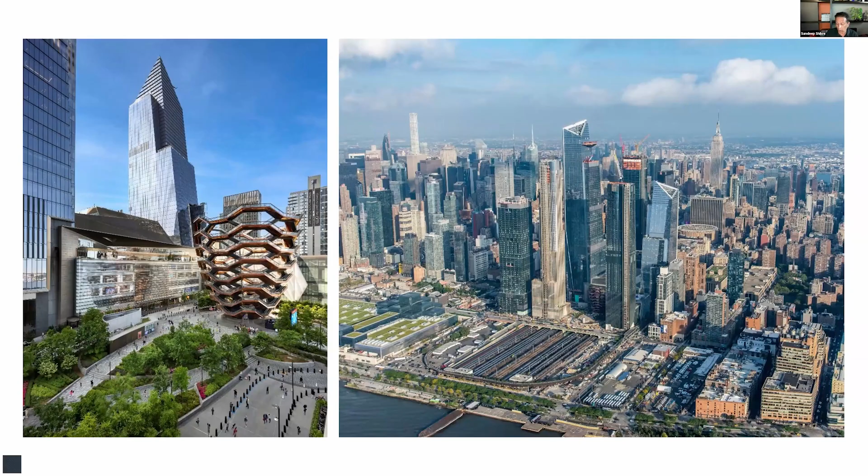Now we are moving from the monocentric city to the polycentric city. The monocentric city had a town center with everything moving around it, and the suburbs coming up for residential development.

In today's situation, polycentric cities are more required, where people want everything within 1 kilometer from their house, be it their school, healthcare facility, recreational facility, office space, entertainment, and so on. So there's less pressure on commuting through vehicles, and less fuel emission. It's more sustainable, and it's working perfectly fine in all parts of the globe.

That naturally further pushes our boundaries to go more taller. So the thought here is a tower, that is density, togetherness, that is reliability. How do we make a nice confluence between both of these thoughts? I'm going to share a couple of our case studies. This is one of our projects which we are doing right in the heart of the city of Mumbai.

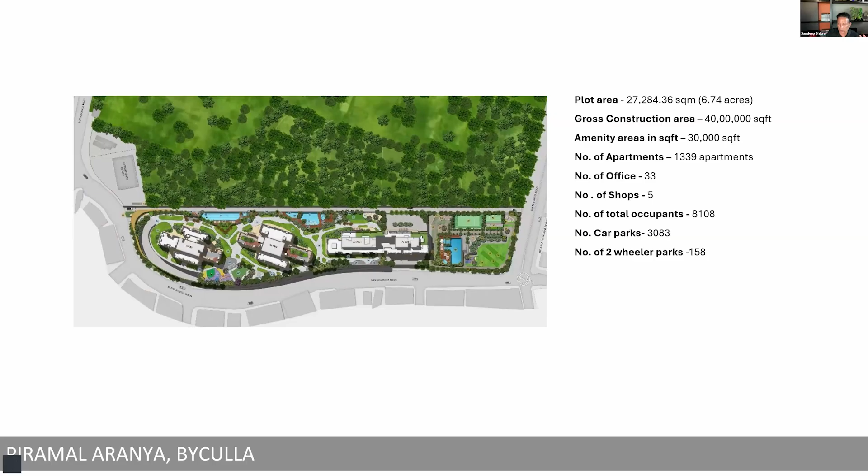Every horizontal space that we could get in this master plan is being utilized to provide green spaces. There's vertical vegetation, vegetation coming up on the podiums, vegetation coming up into people's houses, in the balconies, verandas, and also on the rooftop. That's the context you can see with the high density, high rise community living.

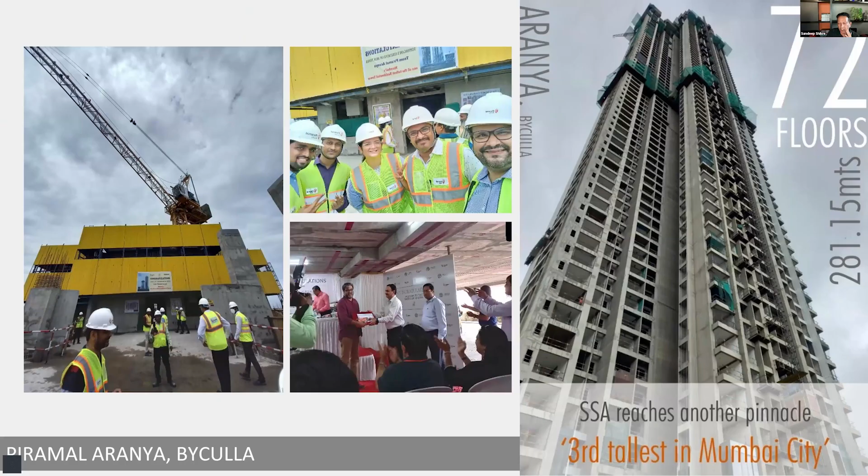This is currently the third tallest building in Mumbai and in India, but it's the tallest building in India where occupied building is concerned. That's the snapshot of the building when it was nearest completion. It has a very simple envelope where again the thought is to get a lot of daylight, openable windows where you can have natural ventilation, enjoy the weather, and we could almost continue that particular forest filtering into the master plan, whereby the podium also has lots of trees.

Overall, we planted more than 1,500 trees on the podium and on the ground. There are several recreational facilities, which again give an opportunity for all age groups in the family, right from toddlers to teenagers to mid-agers, parents and grandparents. A lot of community

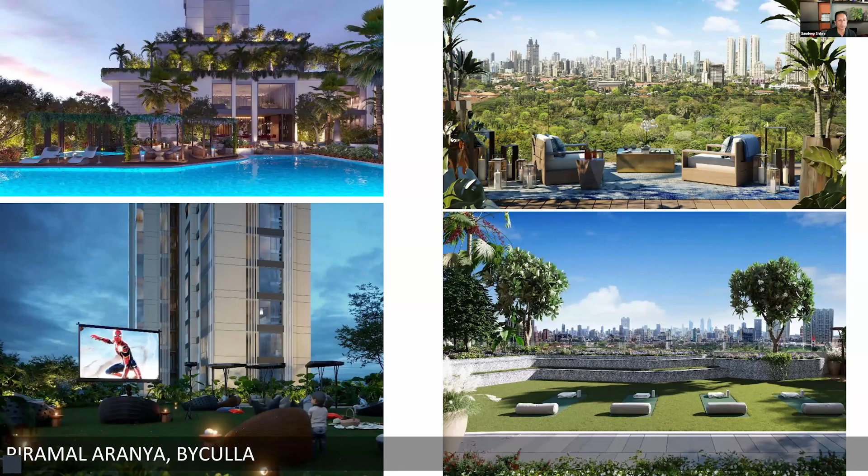conglomeration spaces where people can come together. Practically everything that you need for a livelihood is available in the compound. That includes your health, your fitness, your hospitality requirements, your requirement for relaxation, meditation, and also there's a convenience shop. So people would hardly go out of the campus only for the purpose of going to work. The rest of all the things are available within the compound.

That's also a concept where you can have a very compact development, and there's less pressure on people for commuting with vehicles. The rooftop is also a great opportunity because Mumbai has great weather and there's a beautiful stunning view all around. So these particular premises are complete.

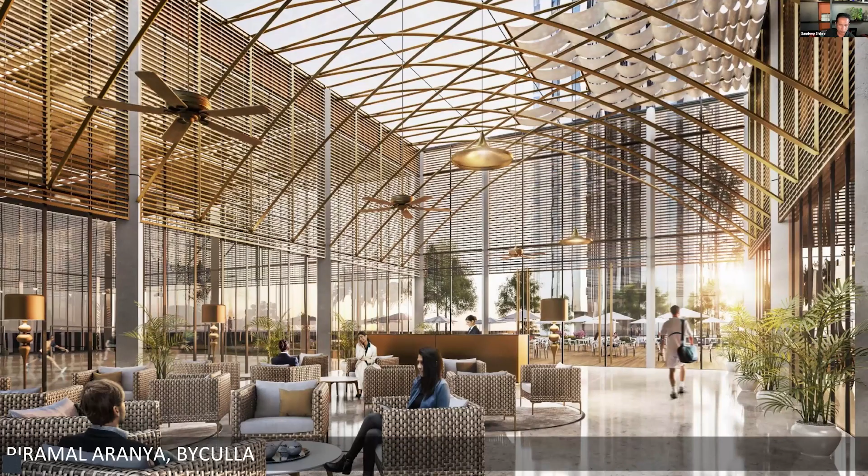There are almost 1,400 families living there, and they have several indoor-outdoor facilities, which maintain that community living spirit amongst all of them. So it's a vertical city, which is a need of the hour. We've tried to accommodate that by providing a very compact development.

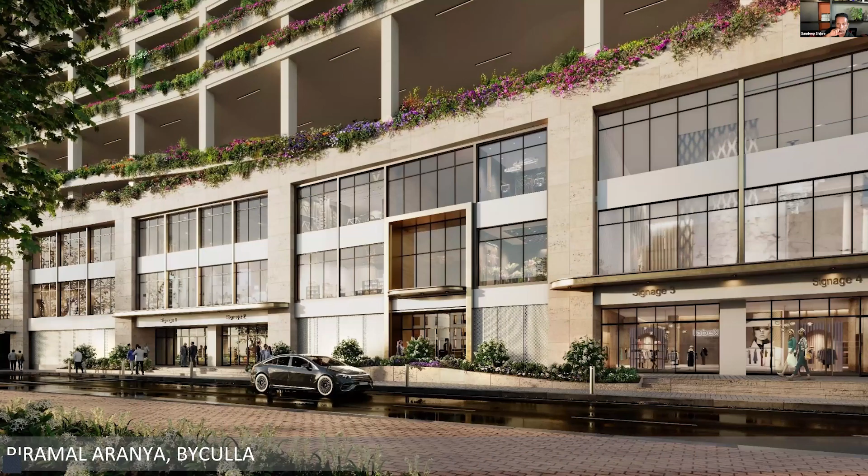This is a convenient shopping area, what is normally required for the residential communities within the compound. And of course, it has a nice biophilic design whereby the envelope embraces the nature around you. So you have a beautiful sky view, you have nice daylight filtering into every square foot of the apartment. That's a rooftop where people can go at a height of almost 281 meters and enjoy the city view. At the same time, a lot of social gatherings and festivals can be held over there.

I move on to my second case study. This is a mixed use project, a little different. This is coming up into a place in a city where there was no commercial space, and this is a new thing that is evolving. There is no particular central business district anymore. People are having all kinds of opportunities to have a mixed use development. This is the tallest mixed use building in the country.

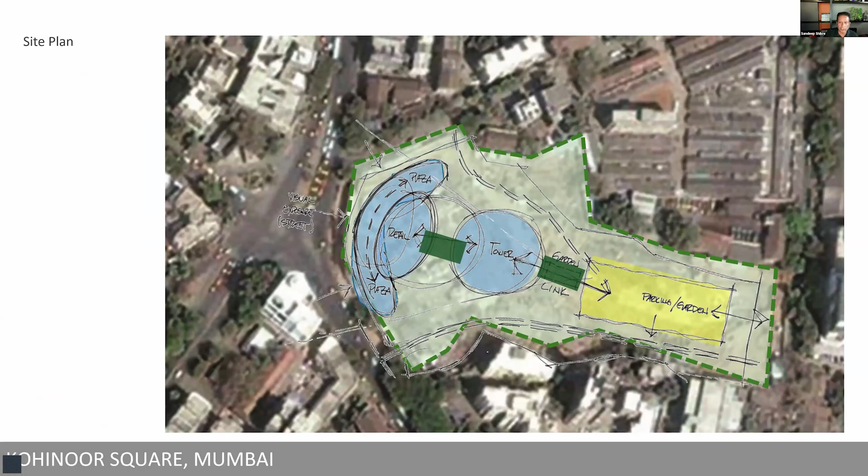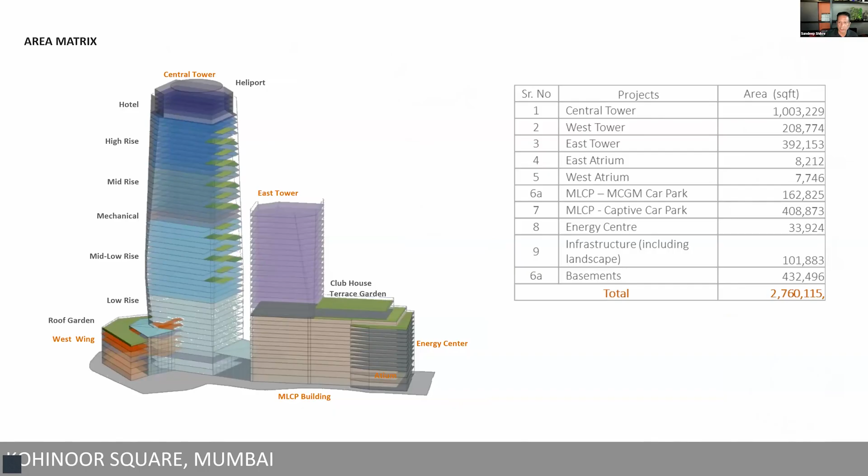Again, a very strategically located plot where we could have a master plan, with retail at the ground, restaurants and hospitality at the lower level, and a tower springing up with a helipad on top. It's totally a 3 million square foot development with retail, office, hospitality, and residential. The numbers are overwhelming: almost 2,200 car parking spaces, 132 families, 9,000 employees.

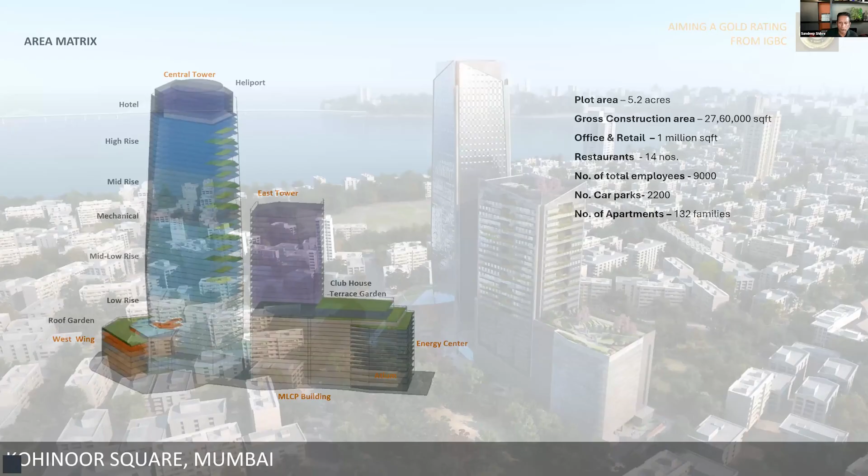That's an aerial shot. It has multiple drop-offs like you have at an airport, because every day 10,000 people would come and go. It's got a beautiful glass facade which allows daylight to filter into every square foot of the building. There are lobbies where a large number of people coming in and going out are accommodated.

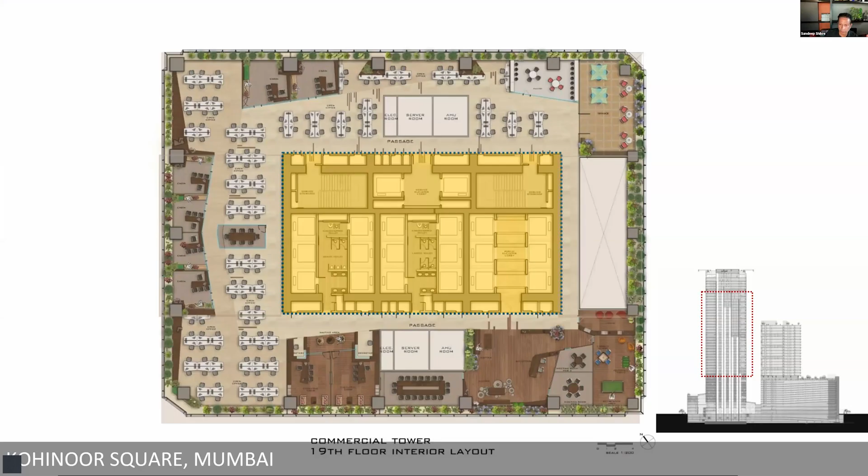The footprint is very thoughtful, with a central core and almost 14,000 square feet of office space which has no column or beam or any structural interventions. Almost all the daylight comes inside the office space. Every work session can have a sky view, which is very important.

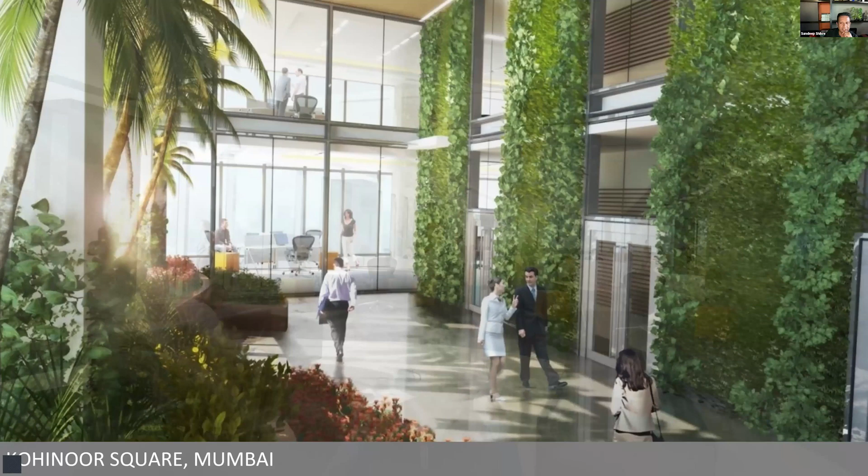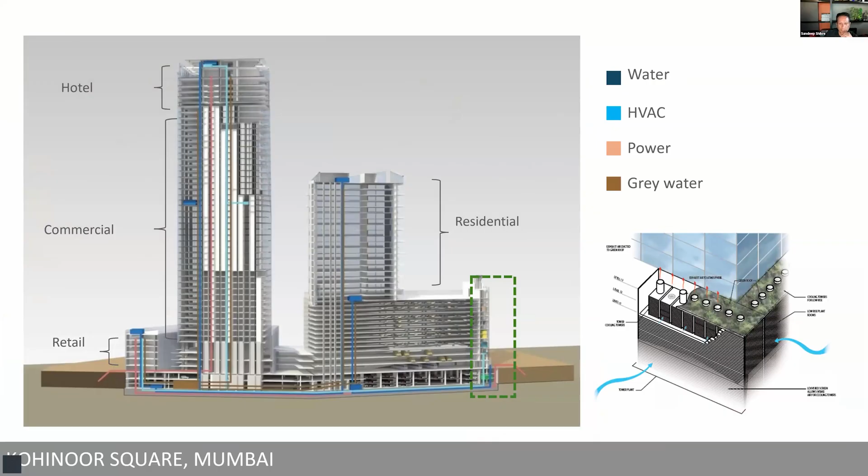Every floor has a sky garden with oxygenated plants, which biofilters the air and purifies it. A lot of engineering thought went into vertical stacking. There's an energy center in one corner that houses the DG set, transformers, cooling towers, and there are tunnels which take all the services on top.

Vertical transportation is one of the very important aspects, because that's a lifeline for the tall building. This is an Indian Green Building Council Gold rated project. Here are some snapshots of the offices.

There's a signature hospitality space on the rooftop, which also becomes a nice gathering space. It's got a stunning view on all four sides.

There is a residential building sitting on top of the parking garage, which has around 132 families. Every apartment has deep balconies and terraces, so there's also a good indoor and outdoor connection.

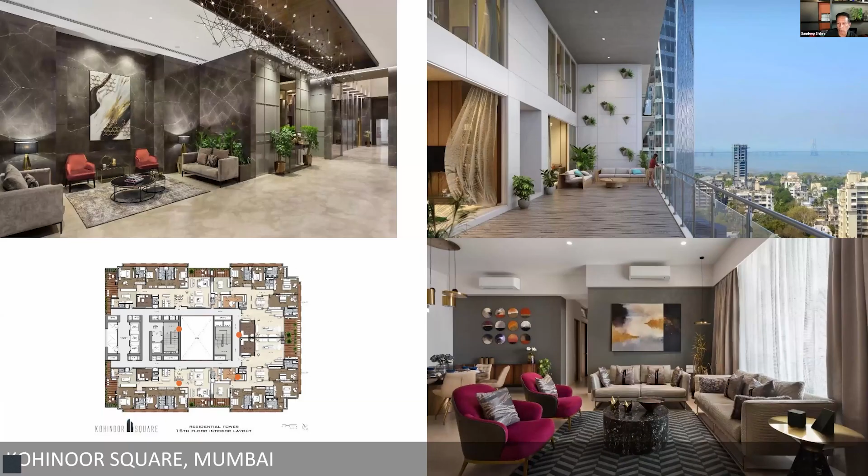As we don't have space on the ground, the podium tops and terrace tops have been utilized for recreational spaces. As I mentioned, every square foot which is horizontal is green. We have a clubhouse on the 14th level with an infinity pool and all kinds of facilities.

There's a small film that explains the project.

Before concluding, I would say that the future is just like James Cameron's sci-fi movie Avatar, which depicts the self-sustainable super tall home tree. This would probably be the next step after zero energy and positive energy structures, where skyscrapers will sustain the neighboring communities by reducing the eco footprint, reducing energy consumption, reducing travel impact, reducing land use, increasing vertical density, and also maintaining farm and forest land. So there's no doubt that tall buildings and high density structures are the need of the future.

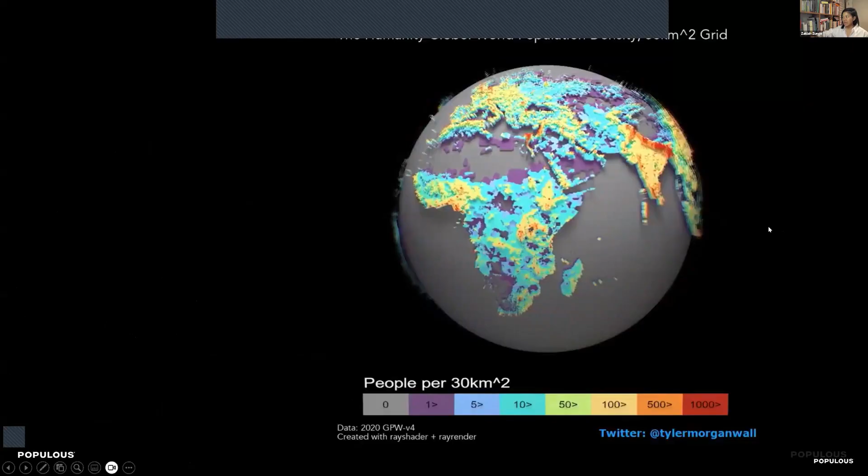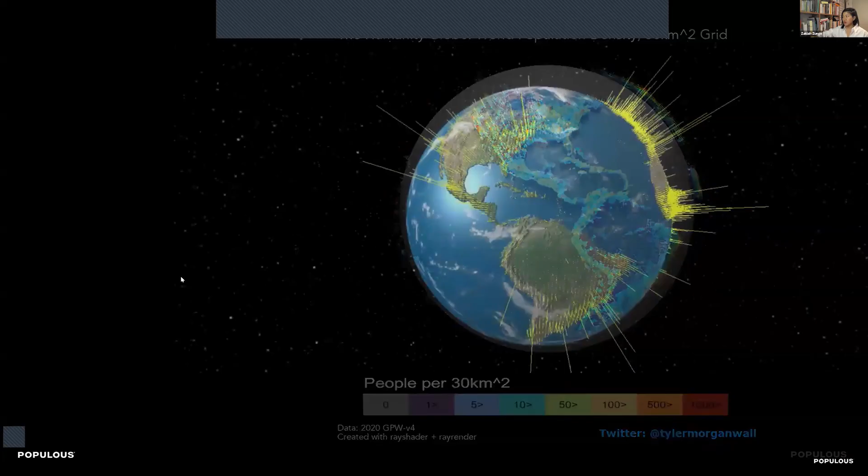This is a color coding of the number of people that we have in terms of spaces. You can see in Asia, they are more red, and at the coastal areas it's a lot higher. Java is also really red. If we were to turn this into an even more visual graphic where the high points show the higher density areas, we have to have some kind of a long-term solution, right?

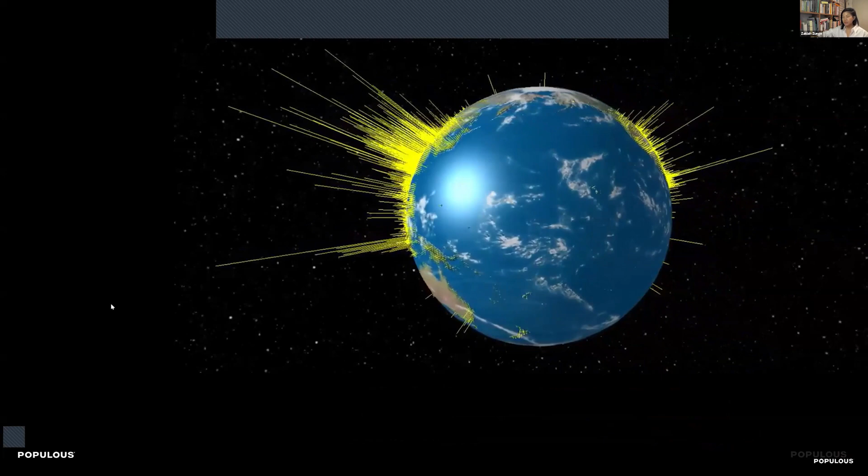And we already see this long-term solution happening in a few countries, including where I live right now, which is Singapore. And my first takeaway of it is: planning is everything. All of us are architects and we love to see our creations come to life.

We love to shape and sculpt and meld art and space together. But it goes beyond that. You build one, you build two, great. But then you realize that you're living on an island full of these cities.

And again, Hong Kong is an island, the Hong Kong island itself, very similar to Singapore. And a lot of its spaces are actually not very buildable because it has mountains and hills, really steep slopes that are pretty dangerous for construction.

So what are we doing to kind of resolve this? Are we going to keep building higher? In Singapore, we almost just erase older buildings and then build even taller ones that are more efficient. And it seems like for now, it becomes a viable solution for long-term high population areas.

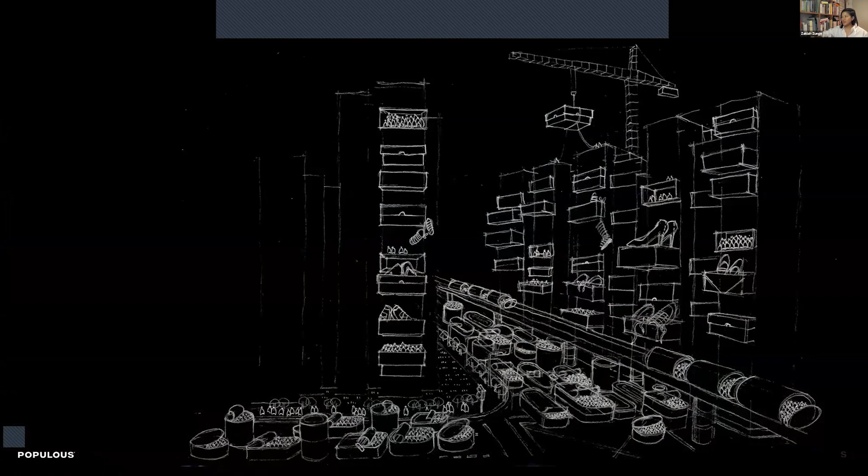This is a funny sketch I did when I was a student. You gotta go to school or work, and you come from a shoebox apartment, you go down to the tin can, and you get packed in a bus full in a traffic jam. It doesn't end, right? Even if you take the train, it's packed.

What becomes the end of this? Because Singapore, I feel, and Hong Kong, has maximized a lot of our towers. We have been pushing and pushing to make everything very efficient, very multi-use. Even our sports halls are all stacked on top of each other.

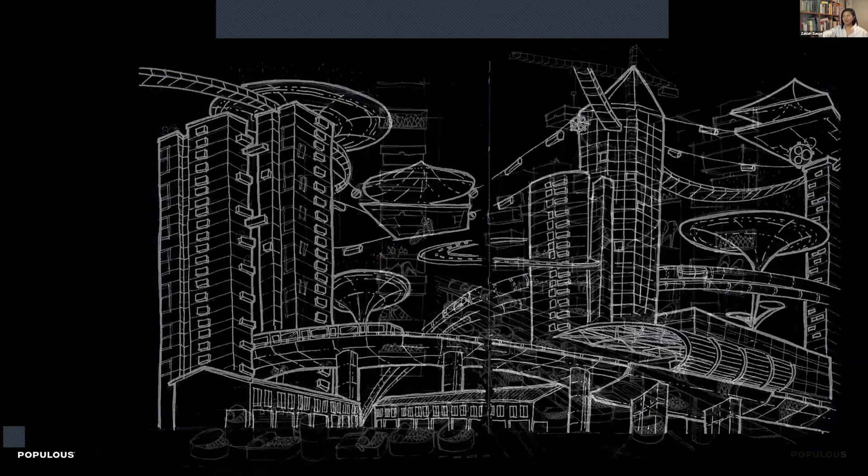And somehow as kids, we are kind of alluded to this cyberpunk, Blade Runner, flying taxi image of the future. Does the future need to look like this? I'm not sure. Are our buildings ready to take on the cable tension forces of these floating bridges? It's something for us to think about, right? Clients never asked us to do that—we're not doing that yet.

What we can do for now, though, going into the future, is to embrace the negative spaces. What I mean is when we have a high-rise, high-density city, like what you see here, and you have the opportunity to actually have some breathing space—all I'm saying is take a pause, allow for that to happen, allow for that to sit in.

Because that very space is where you allow people to come in. That's your civic community space. That's where you can build your stadiums, your co-work centers. Airports are definitely very far out from the city because you have airplanes flying in. But also, when you want to create a draw, you need to have that gap.

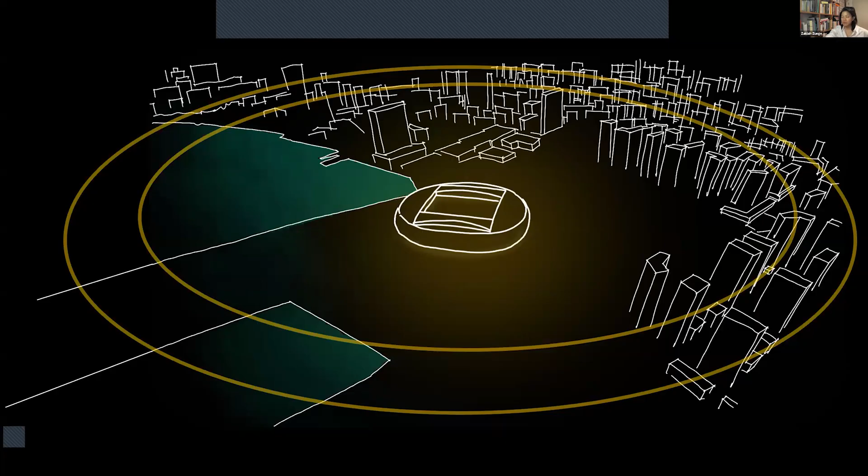And when it was reclaimed, it was used for Kai Tak Airport up till about the 1980s, 1990s. And if you look at the old Kung Fu movies, if you landed at Kai Tak Airport, they were ironing from the window. At some point, the planes got larger and bigger and heavier, and it couldn't support them anymore. We actually had to tell the client, you know what?

Don't build anything. Don't build another 50 towers and take a risk. Let it sit. Let it become a sports park. And becoming a sports park was the best decision. I mean, look at this, right? It takes a lot of bravery from the client to say, hang on, I'm not going to build another one of these towers because they're all competing. But a sports park is to serve everyone.

What it does also at night, it offers some kind of visual respite. It says messages like 'Good morning,' Coldplay is coming, and this is very much similar to, if I were to put it on steroids, the MSG Sphere in Vegas. This is the largest almost spherical structure in the world. It's much wider than it is tall, with 1.2 million LED pucks. And with the MSG Sphere, you literally have to punctuate the negative spaces with the nodal point.

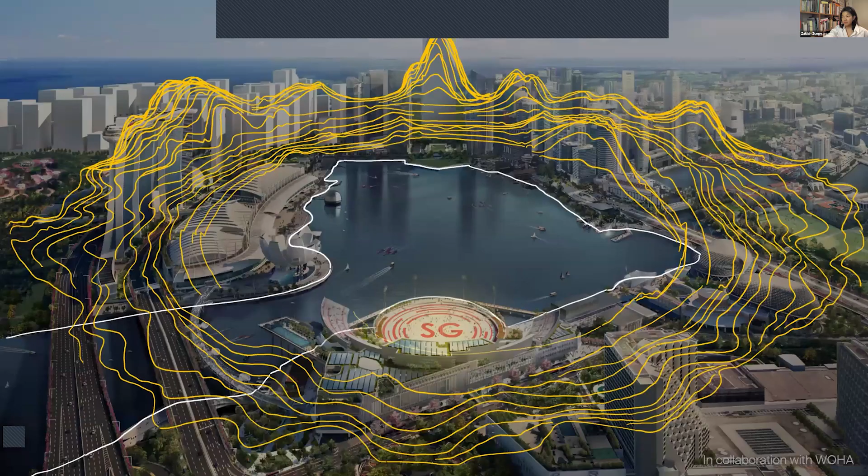So if you're wondering what this funny shape on the screen is, this is actually Marina Bay. It looks a little unrecognizable because there are no buildings on it. But what I want to show is with everything that's built there, you might recognize it a bit more. In this image, if I start from the left side, you have Marina Bay Sands, and then you've got the banks and all these towers.

And as you go towards the right, you've got the older Parliament, followed by the cultural centers, and then we have NS Square right in the middle. While Singapore prides itself on all these super efficient, economically viable banking towers, every nodal point, every negative space has its own individual identity, and they're very distinct from each other.

If I were to start from the left, we have Gardens by the Bay. We reclaimed it, let it sit for 10, 15 years where nothing happened, and then we just built a park. What kind of statement is that, right? Of course, next to it there's a casino. Yes, it more than compensated all that money.

And then you go towards the right, you have the Padang, which was a political space to voice maybe unhappiness or what have you. Then towards the bottom, there's the Esplanade, which was Singapore's icon of the 2000s, late 1990s. And right in the middle and bottom of this is NS Square, which is the space we're going to celebrate Singapore's birthday, and F1 is going to go through there.

And just to curate this takes a lot of effort from everyone. To hold back and not build more is a restraint that we all need to practice to make sure that our cities still remain livable.

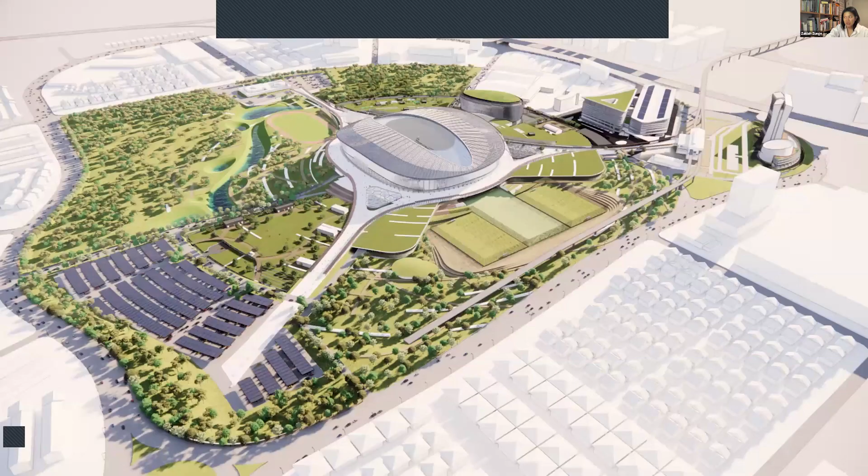This is what we're going to do to make sure that our cities keep on living again. And with that, I'll just end with an image of a master plan. You can see over here, we have like a mix of maybe mid-rises. We've got a bus terminal, we've got a hotel, and kind of alluding towards the middle is actually the stadium, which is Shah Alam. It's a 45,000 seat stadium.

And that gap allows it to take shape, to manifest the concept of connecting the LRT station, which is transport, to the mosque in the north, top of the page, to the night markets that you have at the bottom left of the page. So with that, I'll just end my presentation here. Thank you for your time.

Thank you so much for the presentation. I'm sure all our audience members were quite excited and looking forward for the presentation, and now they are extremely happy to actually see the kind of works that you're doing. So thank you very much for that.

So both your presentations highlight the power of architecture that connects people, shapes communities, and inspires engagement. Let's explore a few deeper threads in conversation before we move on to the audience questions. One question I want to ask, either of you can answer, is how do you ensure that your projects, even at large scale, remain human focused and welcoming? Because when there are large scale projects, it becomes quite difficult sometimes to match the human touch, the human focus. So how do you deal with that? Either of you can answer. Both of you, actually.

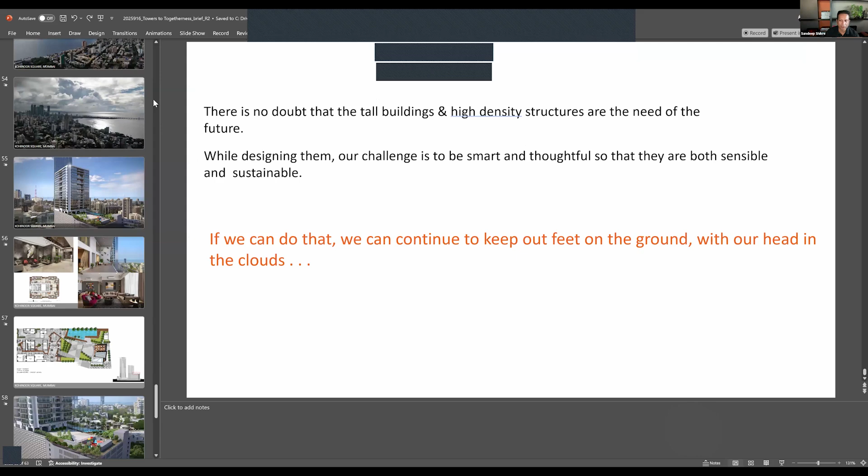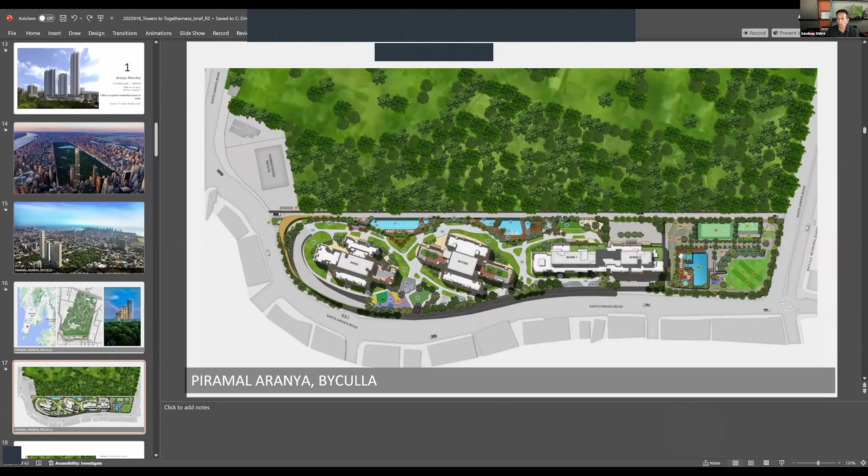Which again focuses on the surrounding, where we could focus on the biophilic characteristics which is around the site. And that's so important to capture, and make sure that people, while they are into a highly dense environment, yet they have that nature embracing them. So there's always an attempt as a designer, as an architect, to ensure that the connect of the built environment with the nature, their functional requirements, their ability to have the efficiency in the performances, may it be residential or a commercial or a mixed use, are well achieved. Safety is one of the important factors, and most importantly, having that particular connect with the nature is very important.

So may it be a residential project, may it be a mixed use project, may it be a project like what Zakiah showed, a beautiful sports arena and a stadium along with all the recreational spaces, the idea is to have that smooth transition of an indoor and outdoor connect with the functional ability of a built environment. That's the focus. I think that's a very important aspect.

You know Sandeep, more and more, when I look at the amount of greenery that you have in front of a development, that's what makes it even higher value, right? Because coming from Singapore, it's so hard to get an apartment not looking into someone else's shower. It's just, this is gold, you know? Like, I want to live there too.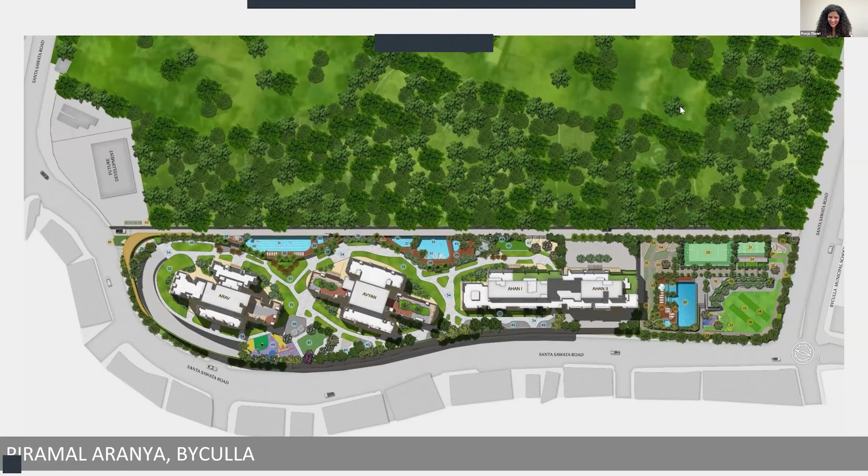But to extend what I just asked, sometimes the environment is absolutely not friendly, especially in metro cities. And of course, Singapore also, Zakiah would agree that sometimes the environment is just not friendly. You don't have that level of greenery, you don't have that level of sustainable resources. Then how do you sort of create that kind of a human touch despite having these environmental challenges?

Yeah, so you cannot look at any particular building in isolation. Singapore is one of the great examples. All their statutory and regulatory provisions are looking at the city, looking at the precinct first, and then they look at the building. If you see everywhere, all the buildings are barrier free. They are very inclusive. They allow the citizens, and they say land belongs to the city and the FSI belongs to our developers. So there is a lot of porosity where people can move through the built environment.